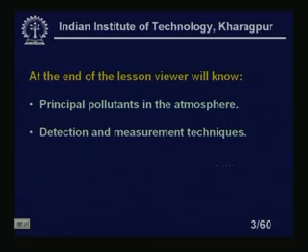Please note that in most cases, the detection techniques are based on the optical system. There is some filter, so we will take out the output and measure it. So basically it's an optical method of measurement in all cases of gas detection.

Then we have gas detection based on optical filter, as I told you earlier. Then we have the color code of air quality index. We have a color code, so that by looking at the color, I can say what is the quality index of the air or environment. So all these things we will study in this particular lesson.

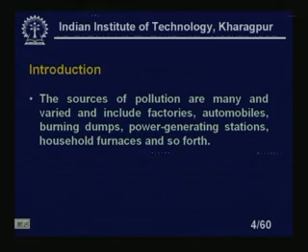The sources of pollution are many and varied, including factories, automobiles, burning dumps, power generating stations, household furnaces, and so on. These are the different types of pollution you will get, along with other basic municipal pollutions.

Factories and automobiles are the main source of pollution in any big city or metropolis. Power generating stations, even when remote from the main cities, will pollute neighboring areas and villages, destroying nearby paddy fields. Household furnaces are not very common in our country, but in many places people still use coal-based or kerosene stoves, which also pollute the environment.

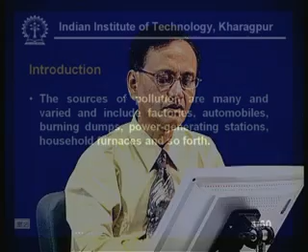So we will study all these things. Common harmful chemicals emitted into the atmosphere include hydrocarbons, oxides of nitrogen called NOx, nitrogen dioxide, nitrogen monoxide, carbon monoxide, and sulphur dioxide. These are the main basic pollutants which are harmful.

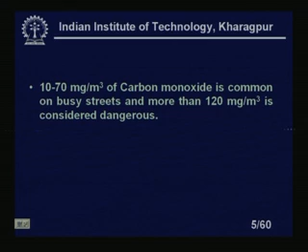10 to 70 milligrams per meter cube of carbon monoxide is common on busy streets, and more than 120 milligrams per meter cube is considered dangerous. We cannot say any environment will be totally pollution free. When you live in a city, where a large number of people live, there will be some pollution, but if it is within the safe limit, that is fine. If it crosses that particular limit, it becomes hazardous.

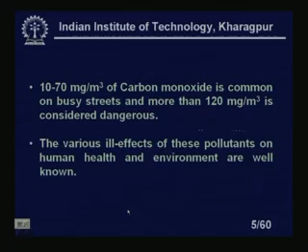The various ill effects of these pollutants on human health and the environment are well known. There are various causes of bronchitis, asthma—all this pollution makes people sick. So this content should be less and less.

It is now recognized that many chemicals undergo photochemical decomposition and reactions in the atmosphere, forming different pollutants which may be even more toxic than their precursors. This is another problem because it will react—a photochemical decomposition—making some other pollutants which are more dangerous.

The nitrogen oxides and hydrocarbons are the most important source of secondary pollutants, called smog and fog. In many cities you will find the morning full of smog, meaning visibility is extremely poor. It becomes very difficult for persons to drive on the streets, very difficult for aircraft to land, very difficult for trains to move, due to this smog. So this is also a very important sort of pollution.

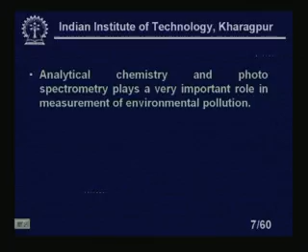Analytical chemistry and photospectrometry play a very important role in measurements of environmental pollution. These are the most important things we usually measure, to quantify the pollution rather than just discussing it qualitatively. Otherwise, how will I know whether it is 10 to 70 milligrams per meter cube, or whether it crosses the 120 milligram per meter cube limit?

The complete process can be broadly split into two steps: sample collection and sample analysis. We will first collect the sample of air that I want to analyze, to know how much pollution is there, then perform the sample analysis. One of the most important steps in air analysis is the collection of the sample. Once the sample has been collected, standard measurement techniques may be employed.

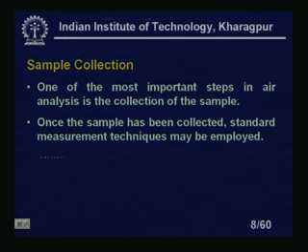The topic of sample collection can be broken down into two broad categories: general considerations and sampling train. So, what are the different precautions we will take for sample collection? What is the velocity of making the suction from the environment, and all these things.

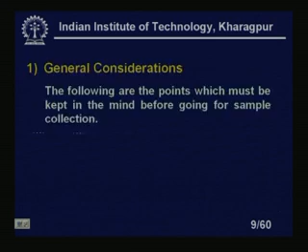General considerations: the following are the points which must be kept in mind before going for sample collection. Size of the sample - the volume of air sample, not the size of dust particles, but how much air you will collect from the environment to analyze it. The volume of air sample is governed by the minimum pollutant concentration that must be measured, the sensitivity of the measurements, and the information desired.

The sample size is generally chosen by trial and error method, and trial samples of more than 10 meter cube may be required to determine ambient concentration. Sometimes we need a large volume to know the ambient concentration or an average concentration, instead of taking very small samples. If we take a large sample, the results will be averaged over a particular area.

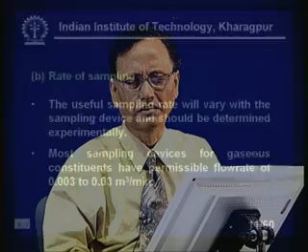Rate of sampling: the useful sampling rate will vary with the sampling devices and should be determined experimentally. Most sampling devices for gaseous constituents have a permissible flow rate. As I told you, we have to collect it with some suction pump. So, the velocity will be 0.003 to 0.03 meter cube per minute.

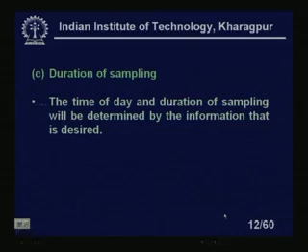Now, duration of sampling is also important. Time of the day and the duration of sampling will be determined by the information that is desired. Because if you take a sample on a busy street at 5 o'clock in the morning, there is hardly any pollution at that time, but at 10 o'clock in the morning, you will get an exact estimate of how much pollution is there, or what is the worst case pollution in the streets in the evening or morning.

Sampling period will give an indication of only the average concentration during that period. So, suppose I am taking a sample for 1 hour - that means I am averaging over that 1 hour. That is a good measurement.

Then, storage time of the sample - this is so important. Storage time of the air sample should be kept to a minimum, because in some cases it can decompose, so after making the collection we should do a quick analysis.

They should be protected from heat and light - this is another important thing. Care should be taken that the desired test component does not react with the other constituents or with the container. So, the container should be inert, probably made of glass or stainless steel, so that the pollutants or gases do not react with the container.

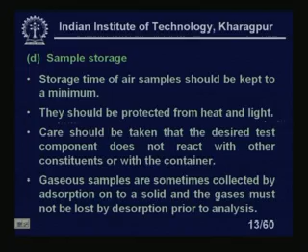Gaseous samples are sometimes collected by adsorption onto a solid, and the gases must not be lost by desorption prior to analysis. Many samples collected by adsorption remain on the solid material and should not be released or desorbed before analysis. Because if that gas desorbs before analysis, that particular gas will be lost - we cannot analyze it, and it will show as if there was no such gas, even though it was there and by that time it is lost.

Sampling train: the requirements for intermittent air sampling are a vacuum source, a means of measuring the amount of air sampled, and a collector. So we have a vacuum source, a means of measuring the amount of air sampled, and a collector, because without a vacuum source we cannot collect the sample.

Vacuum source: motor or hand driven vacuum pumps, aspirators, and automobile vacuums are generally used to draw the sample through a collection device. This is basically a pump by which you collect the sample from the environment and store it in a collector.

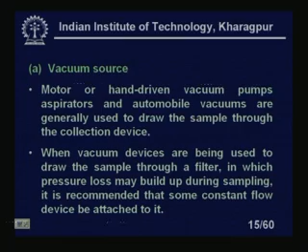When vacuum devices are used to draw the sample through a filter, pressure loss may build up during sampling, so it is recommended that some constant flow device be attached to it, because using a filter will cause some pressure loss across that filter.

Now, metering devices - flow measurement devices are of two general types. We have already studied these flow measurement devices in this particular course on industrial instrumentation.

Some will make the rate measurements, some will make the volumetric flow measurements, some will make the mass flow measurements. We are more interested here, instead of the rate measurements, on the volumetric measurements. Flow measurement devices are of two general types: those that measure the rate and those that measure the volume, or you can make the total volume also.

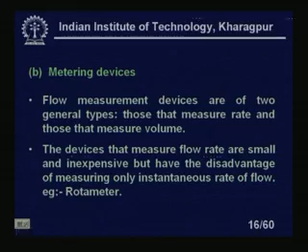The devices that measure the flow rates are small and inexpensive, but have the disadvantage of measuring only instantaneous rate of flow. One is the rotameter. It will just give the instantaneous rate of flow; it will not give the total volumetric flow of a device over a certain amount of time.

Devices that measure the volume record the flow passing through them and are therefore more useful. They are, however, bulkier and more expensive. The rotameter is a very simple indicating instrument, which we have studied in detail in flow meters. Other devices include turbine flow meters and other gas flow meters, or the orifice meter, which is obviously bulkier.

All gas measuring devices should be calibrated before use, because you are measuring the volume, so however much collection you are taking, it should be calibrated beforehand.

A direct calibration with the actual gas can be carried out by means of a gasometer system. Here the gas flowing to the flow meter during a timed interval is trapped in the gasometer bell, and its volume is measured.

The last component of the sampling train is a collector, which may be of a variety of types depending on the particular application. These are very important things to consider.

If you look at the gasometer, its basic principle is that it has a known volume device. Direct calibration with the actual gas is carried out using the gasometer system, where the gas flowing to the flow meter is trapped in the gasometer bell and its volume is measured.

The last component of the sampling train is the collector, which may be of a variety of types depending on the particular application.

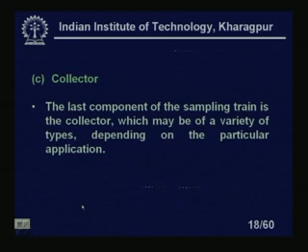For aerosol contaminants, one of the most commonly used means of collection is filtration. Fiber filters include wood fiber, paper, glass fiber, asbestos; granular filters include glass, metal, or porous ceramic sand; and membrane filters such as cellulose ester are also used. These are the different types of filters commonly used for aerosol contaminants in filtration.

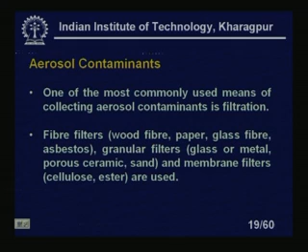A second type of collection device for both solid and liquid aerosol contaminants is the impinger. The aerosol impinges on a surface exposed to the air stream, and these include both dry and wet impingers.

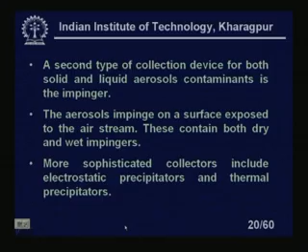More sophisticated collectors include electrostatic precipitators. These are collection devices that, in a sense, reduce environmental pollution, and are commonly used in power plants because of ash pollution. Using electrostatic precipitators collects the ash so it does not go into the environment; that type of principle is used here.

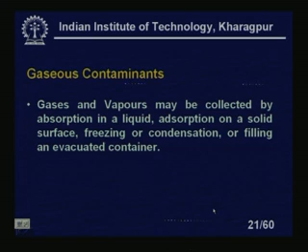For gaseous contaminants, gases and vapors may be collected by absorption in a liquid, adsorption on a solid surface, freezing or condensation, or filling evacuated containers. Evacuated containers can also be used, as told earlier, or it can be done by freezing, condensation, or absorption in a liquid, or adsorption on a solid. These are the different methods by which gaseous contaminants can be collected.

Absorption is one of the most widely used techniques for gas collection. The gas components of interest are dissolved in a suitable liquid or solution, or on the surface of a hygroscopic solid. The most efficient absorption device is the fritted glass scrubber, where it can be collected.

Carbon monoxide detections.

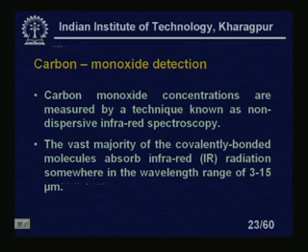Carbon monoxide concentrations are measured by a technique known as non-dispersive infrared spectroscopy. The vast majority of covalently bonded molecules absorb infrared radiation somewhere in the wavelength range of 3 to 15 micron. This is the entire range of absorption spectra for various gases in the infrared region.

This represents the amount of energy required to start atoms vibrating with respect to each other. Carbon monoxide is a very simple molecule that has only one mode of vibration, analogous to a coil spring - a wound coil spring will vibrate like this. It goes to displaced positions and comes back to the same bond again, releasing light energy.

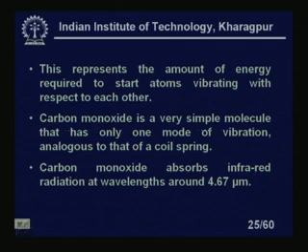The carbon monoxide absorbs infrared radiation at wavelengths of around 4.67 micron. The atoms take up the light energy to move slightly further apart than normal - the two atoms go further away. Then it collapses, releasing the light and returning to the same state again. So the atoms take up the light energy to move slightly apart, then liberate that energy in the form of heat when they decompress.

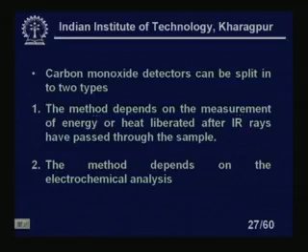Carbon monoxide detectors can be split into two types. The first method depends on the measurement of energy or heat liberated after IR rays have passed through the sample - that is the optical method. The next method depends on electrochemical analysis. So these are the two methods: the optical method and the electrochemical method.

Carbon monoxide analyzers pass an infrared light beam alternately through a reference cell containing a non-absorbing gas like nitrogen, and a sample cell containing air with carbon monoxide to be measured. The infrared light of 4.67 micron wavelength is absorbed from the sample to the extent that corresponds to the carbon monoxide concentration.

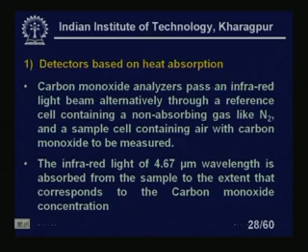The next step is to receive the infrared beam through a nitrogen-filled reference cell and a sample cell, which now have different intensities due to light absorption by carbon monoxide in the sample cell versus the nitrogen-filled reference cell. The difference in measured intensity is converted to a carbon monoxide concentration - one reading without carbon monoxide and one with carbon monoxide gives us the difference.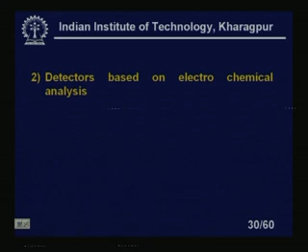Now, detectors based on electrochemical analysis work like this: when the gas is electrolyzed while maintaining the potential between the electrodes immersed in electrolyte, the current assumes a value proportional to the gas concentration. This is because the electric potential at which electrolysis takes place depends only on the carbon monoxide concentration, which is then measured.

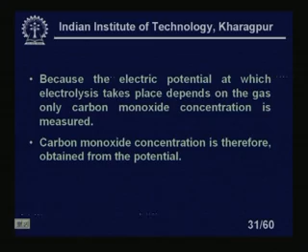Carbon monoxide concentration is therefore obtained from the potential. If I measure the potential, it can be calibrated in terms of the carbon monoxide concentration in the gas, because the electric potential at which electrolysis takes place depends only on the concentration of carbon monoxide. So that voltage can be directly calibrated in terms of carbon monoxide concentration.

Now, NOx measurements are very common, not only in our environment but also in industry. NOx means nitrogen oxide and nitrogen dioxide - these two types of gases we are calling NOx. NOx Analyzer, NOx Measurement, NOx gas.

So whenever we talk about NOx, it means NO subscript X - nitrogen oxide and nitrogen dioxide. NO is nitrogen monoxide, and nitrogen dioxide is NO2.

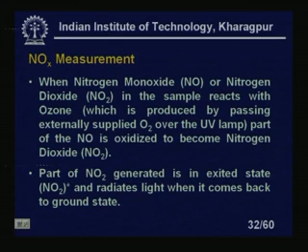When nitrogen monoxide or nitrogen dioxide in the sample reacts with ozone, which is produced by passing externally supplied O2 over a UV lamp, part of the NO is oxidized to become nitrogen dioxide. Part of the NO2 generated in this process is in the excited state - we define it by this notation.

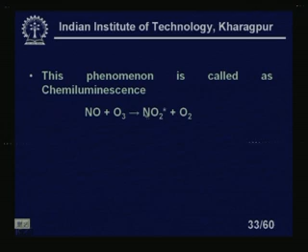This phenomenon is called chemiluminescence. We define this NO2 with an asterisk to mean it is in the excited state. NO2 asterisk, the excited state, goes to NO2 plus H nu - releasing energy. So the light will be emitted.

This reaction is very fast and only NO is involved, without almost any effect from other coexistent gases. This is important to remember, because it should not react with other gases, so the concentration of other gases cannot be detected by this method.

So this phenomenon is called chemiluminescence. Nitrogen oxides react with ozone, making nitrogen dioxide which is in the excited state. It will go back to the normal nitrogen dioxide state, liberating light.

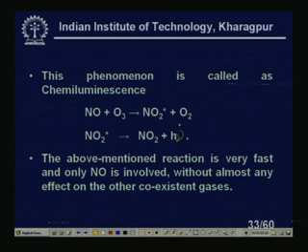This method is very fast, and only NO is involved without almost any effect from other coexisting gases. If the NO is at a low concentration, the quantity of luminescence is proportional to that concentration.

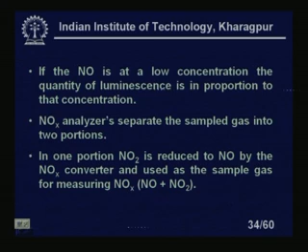Now, NOx analyzers separate the sample gas into two portions. In one portion, nitrogen dioxide is reduced to NO by the NOx converter and used as a sample gas for the measurement of NOx, which is NO plus NO2. In the other, the NO sample gas is used as it is.

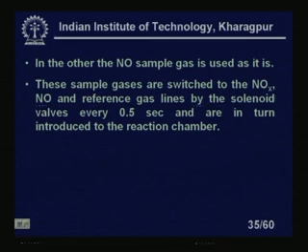These sample gases are switched to the NOx, NO and reference gas lines by solenoid valves every 0.5 seconds, and are in turn introduced into the reaction chamber.

On the other hand, the open air that was separately sucked through the air filter is dried by the self-reproducing type silica gel dryer, then introduced as ozone gas into the reaction chamber by the ozonizer.

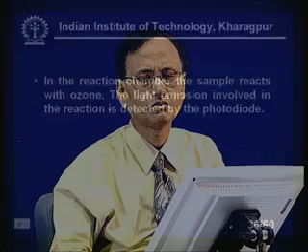In the reaction chamber, the sample reacts with ozone. The light emission involved in the reaction is detected by the photodiode, which in turn gives a current that is calibrated as a concentration.

So photodiode output will be current - photodiodes can always be used for detection of light, and that output can be calibrated in terms of concentration.

Now, what are the precursors and pre-processing we must note? One of the problems with NOx measurement is its affinity to water. Any water present will immediately be absorbed, and you cannot find the NOx. So the container should be totally air or water free - that is the most important thing.

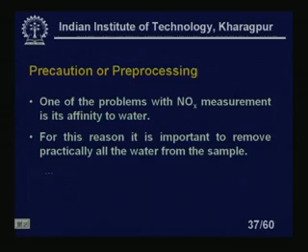For this reason, it is important to remove practically all the water from the sample, because when water is in the sample it may cause other issues. So before analyzing the sample, all the water should be removed.

Dryer is used for this purpose because silica gel dryers and all these dryers will obviously remove the moisture content in the NOx, keeping the NOx as it is for analysis purposes, because ultimately we have to make the analysis of this NOx.

Now, sulphur dioxide is another form of pollution in the environment, so we must look at what type of pollution this is. It is very hazardous, so we must know the contents of sulphur dioxide in the air. Analysis of sulphur dioxide is based on the principles of fluorescence spectroscopy, as I told you, this mostly depends on spectroscopy.

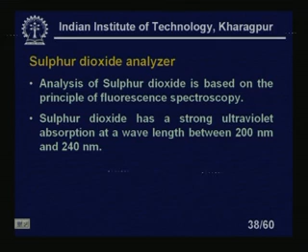Sulphur dioxide has strong ultraviolet absorption at a wavelength between 200 and 240 nanometers. The absorption of photons at this wavelength results in the emission of fluorescence, because this energy cannot just get lost - it is consumed by the sulphur dioxide atom and released as fluorescence.

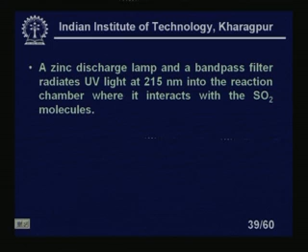We measure the fluorescence and calibrate it by spectroscopy in terms of the sulphur dioxide concentration. A zinc discharge lamp and an optical bandpass filter radiate ultraviolet light at 215 nanometers into the reaction chamber, where it interacts with the sulphur dioxide molecules.

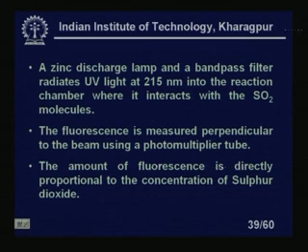The fluorescence is measured perpendicularly to the beam using a photomultiplier tube. A photomultiplier tube is, instead of nowadays you can use photodiodes also or phototransistors - it just multiplies and increases the output current, as simple as that, nothing more. The amount of fluorescence is directly proportional to the concentration of sulphur dioxide, which we are measuring with the photomultiplier tube.

One of the major problems with sulphur dioxide is its extremely corrosive nature and affinity to water. Unlike NOx, which is not that corrosive, sulphur dioxide is corrosive in nature as well as having affinity to water. So we should take higher precautions for analyzing sulphur dioxide than nitrogen dioxide - if I remove all the water from NOx using a dryer, that is fine, no problem. But here we have to think that whatever containers we use should not react with the sulphur dioxide.

The presence of any condensate will quickly remove all traces of sulphur dioxide from the measuring system. So if there is even a little presence of water, it will remove all the traces. Ultimately while analyzing, you won't get any SO2 reading, giving you wrong measurements or wrong indication, which is undesirable.

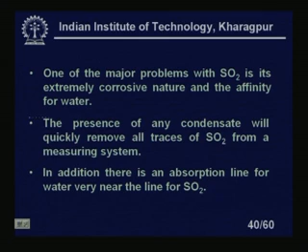In addition, there is an absorption line for water very near the line for SO2. This means the presence of any water vapor will affect the readings, causing lower than expected sulphur dioxide readings. So not only does the reaction occur, but this line also lies very close, resulting in low readings of sulphur dioxide in the presence of water vapor or steam.

Infrared sensors for sulphur dioxide have the advantage of lower cost, but at the expense of greater size. Nevertheless, infrared sensors are one of the most preferred methods of measuring SO2 concentrations in the field nowadays, because of these advantages.

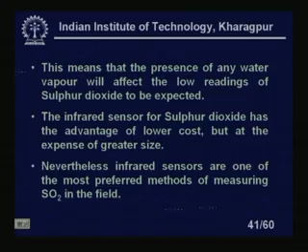That line corresponds very closely to the line of water vapor. Now let's look at ozone detection. The ozone detector works on the principle of absorption spectroscopy or spectrometry or photometry. The wavelength range for ozone is 220 to 330 nanometers, and the absorption spectrum extends to 253.7 nanometers, which corresponds to the main emission line of mercury. So the ozone absorption coefficient was experimentally defined at this wavelength.

253.7 nanometers. To determine ozone concentrations, a sample of ambient air is drawn through a flow cell, which is irradiated with ultraviolet light of wavelength 253.7 nanometers from a mercury vapor lamp.

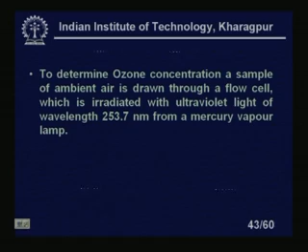Mercury vapour lamp will make a particular wavelength, 253.7, as its line is same as the mercury, so it will produce that stable wavelength. The intensity of ultraviolet light detected by the instrument is reduced depending on how much ozone is in the sample to absorb it. If there is more ozone, it will absorb more, so the intensity will be reduced. If there is less ozone, I will get higher output; if more ozone, less output. So that is an indication of the concentration.

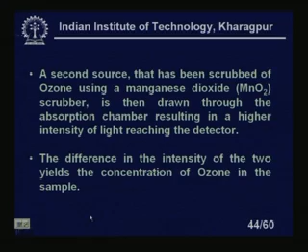A second source that has been scrubbed off ozone using a manganese dioxide scrubber is then drawn through the absorption chamber, resulting in a higher intensity of light reaching the detector. The difference in the intensity of the two yields the concentration of the ozone in the sample.

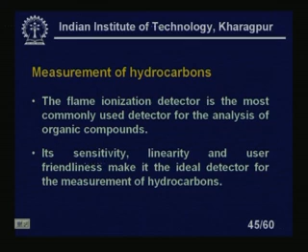Now, measurements of hydrocarbons - hydrocarbons means combinations of methane, ethane, all these things we are calling hydrocarbons. In petrochemical industry, sometimes we call it hydrocarbon-intensive industry also. The flame ionization detector is the most commonly used detector for the analysis of organic compounds or hydrocarbons, both in the environment and in the factory. Its sensitivity, linearity and user friendliness make it the ideal detector for measurement of hydrocarbons.

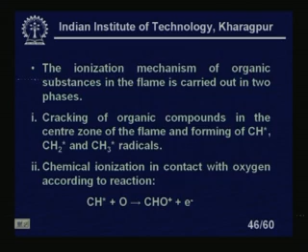The ionization mechanism of organic substances in the flame is carried out in two phases. What are the two phases? First, the cracking of organic compounds in the center zone of the flame, forming CH, CH2, and CH3 radicals. Second, chemical ionization in contact with oxygen according to the reaction: CH radical plus O gives CHO plus one electron. The molar response is defined as being proportional to the number of carbon atoms of the molecule.

The electrons are extracted from the flame using a voltage polarization applied between the nozzle and the collecting electrode.

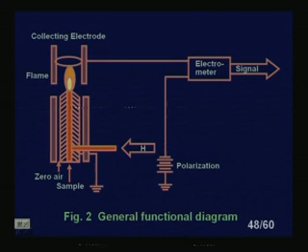Current obtained from the collecting electrode is converted to a voltage and subsequently digitized by the ADC for further processing, because if it is analog signal, I have to convert it to the digital domain by ADC. Figure 2 shows the detailed mechanism of this type of detector. The flame ionization detector sends a signal proportional to the number of atoms composing the hydrocarbon molecules present in the sample, or total hydrocarbons.

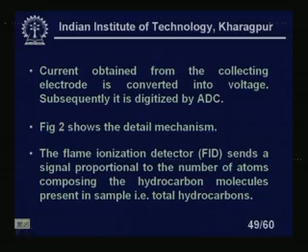Now, another important thing is the air quality index. What is the quality? How do you index it? How do you make the air safe and all this? You must have some index, because if you look at the general public, they will not understand what is this concentration or what is a safe level. So instead of expressing the concentration of carbon monoxide or sulphur dioxide separately, we make the air quality index, which includes the visibility and the quality of the air.

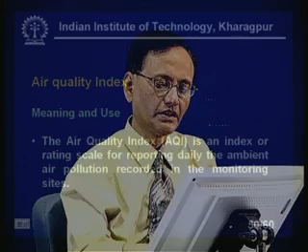Now, let us look at the meaning and use. The air quality index is an index or rating scale for reporting daily the ambient air pollution recorded at the monitoring sites. It usually gives some index of how the air quality in a particular site is, good or bad. The two objectives of AQI are to inform and warn the public about the risk of exposure to daily pollution levels, as I told you earlier.

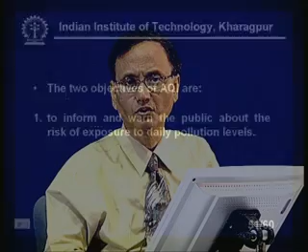So usually we will define this thing. Obviously, we must have a goal that we have to reduce this to some level. People also will know, so there should be some protective measure to bring it down to a particular level.

To enforce regulatory measures for improving AQI, what precautions should we take. Recently air quality has been extremely poor in India, in a metropolis like Delhi, because of a lot of automobile pollution there. So they converted everything to CNG, which gives less pollution. Every time they measure the air quality people are inhaling, what is the dangerous level, and once they switched to CNG for all cars and buses, people found the air quality index improved a lot. This gives a single index so people will know how good the air they are breathing is.

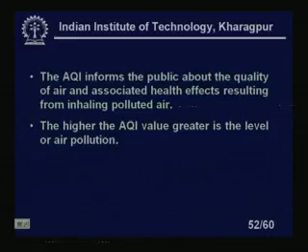The AQI or air quality index informs the public about the quality of air and associated health effects resulting from inhaling polluted air, what are the ill effects and how can you reduce them. The higher the AQI value, greater is the level of air pollution. So obviously the desired value should always be lower and lower. That is the most important thing for air pollution.

Four major pollutants including the suspended particulate matter PM10 are considered for reporting AQI. PM10 is particulate matter of size 10 micron or less. There are PM2.5 also, but we are considering PM10, meaning not more than that, particulate matter of size 10 micron.

Measurements and calculations: the concentration of the pollutant is measured by air quality monitoring equipment at a monitoring station. This pollutant concentration is converted to an index value using the following equation: Index value equals pollutant concentration divided by pollutant goal concentration, multiplied by 100. What is our goal, what is the actual desired value of concentration, and what is the actual concentration now - that gives the index value multiplied by 100, a quantitative measure for the quality of air people are breathing.

The pollutant goal concentration used to calculate the index value is either the NEPM standard for that particular pollutant, or the EPP goal in the case of visibility. Let us look at what is NEPM and EPP.

NEPM is the National Environment Protection Measures. Every country has this. This is basically a broad framework setting statutory instrument defined in the National Environment Protection Council, and they outline and agree on national objectives for protecting or managing particular aspects of the environment.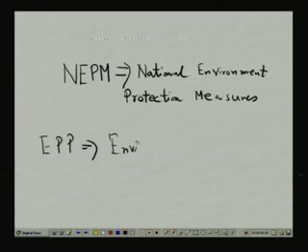And also we have EPP. EPP is basically Environmental Protection Policy. This also looks at all these things.

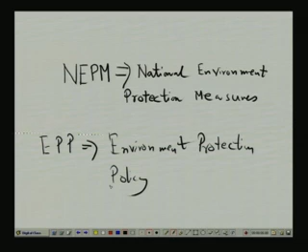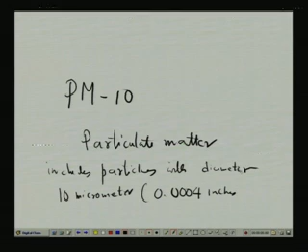Now let us take a new page. PM10 is the particulate matter that includes particles with a diameter of 10 micrometers, which is 0.0004 inches, or about 1/7 the width of a human hair.

We also have PM2.5, but we are not discussing that. Previously there were TSP monitors, which we are also not discussing here.

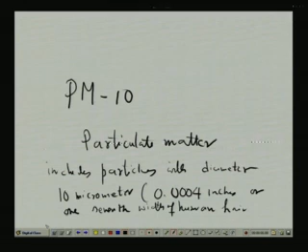The pollutant goal concentration used to calculate the index value is either the Air NEPM standard for that particular pollutant, or the EPP (Air) goal in the case of visibility. Visibility is most important because if there are suspended particles, or PM10 present, it will reduce the visibility of a person. So what should the visibility goal be - 10 kilometers or 20 kilometers - that we must know. This gives some standard for a particular country. The Air NEPM standards and EPP (Air) goals used in calculating the index values are presented in Table 1.

You see here, that's Air NEPM standards. Ozone is 0.10 parts per million, averaged over 1 hour. Nitrogen dioxide is 0.12 parts per million for 1 hour. Sulphur dioxide is 0.20 parts per million for 1 hour. Carbon monoxide is measured over 8 hours, and PM10 is 50 microgram per meter cube for 24 hours. These are the NEPM standards.

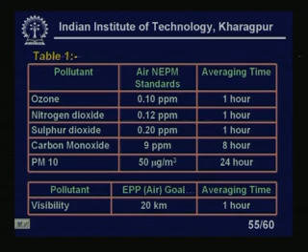And for pollutant visibility, it is 20 kilometers. The EPP goal is 20 kilometers for 1 hour averaging time. The EPP goal for visibility reduction particles is 20 kilometer visibility, which means you would be able to see clearly for at least 20 kilometers.

Obviously this is a sort of pollution consideration. Why have we taken PM10? These two should be different, because some gases like carbon monoxide and ozone are not visible, but they still pollute the air. We consider two types: visibility consideration and health hazard. Visibility is not hazardous to people directly, but it makes other things difficult - the landing or taking off of aircraft, or the movement of trains or cars becomes difficult. That's also a measurement of pollution. That is the reason we have introduced PM10.

This goal is related to the light scattering coefficient value measured using a nephelometer. A scattering of 235 or less, where mm minus 1 is per million meters, is equivalent to visibility of more than 20 kilometers. So this will also give you the visibility value. Usually in many countries nowadays they will straight away give you the visibility from these measurements.

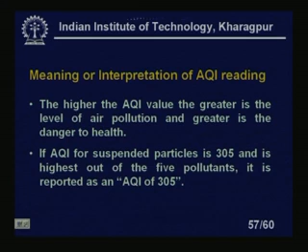Meaning or interpretation of AQI reading: the higher the AQI value, the greater is the level of air pollution and greater is the danger to health. PM10 is also considered along with visibility. AQI for suspended particles is 305, the highest out of the 5 pollutants, and it is reported as an air quality index of 305.

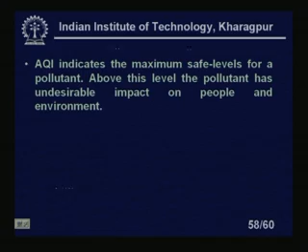AQI indicates the maximum safe levels for pollutants, and above this level the pollutant has an undesirable impact on people and the environment. This indicates the maximum safe levels for pollutants and how much pollution it can cause. If it goes above that level, it is not good for the health of persons or any living being.

If AQI falls below 50, the air quality is considered extremely good. As I told you, if the AQI is higher, pollution is more. An AQI reading between 51 to 100 indicates moderate air quality. An AQI reading from 101 to 200 indicates poor air quality, and a reading over 201 indicates very poor air quality, and an AQI above 301 is regarded as critical to human health.

This is some category, it varies from country to country, but it is always desirable that the AQI should be below 50.

Now we have a color code representation of AQI, so that anybody can understand it. Green always means friendly, environment-friendly, a good environment, so we have given it the color green. So 0 to 50 AQI value is green color, meaning good. 51 to 100 is marginal moderate, we have yellow - I cannot justify why it is yellow, it is just a standard to be followed. Obviously green means our environment is green, always better for us.

Then we have 101 to 200, unhealthy, poor, which is orange. Then 201 to 300 AQI value is very unhealthy, very poor, which is considered red, an alert - red always means alert. And 301 plus is critical.

There is no more for consumption, I mean for that, air's consumption for the human being or any living animals. So these are the things which we have considered in this. What we mean by AQI.

Because it is very difficult to remember all these numbers, instead of giving the numbers, we will measure this, but once we define it to the public, we will give it with some color, so that green is better, yellow is okay fine, orange is not that good, red is quite bad, and if purple, it is extremely bad. So with this AQI color coding we can explain to the general public what color they should expect in their particular area of residence or a particular area where they are working. So with this, I come to the end of lesson 37 of industrial instrumentation.

Welcome to lesson 38 of industrial instrumentation. In this lesson we will cover the control valve. In fact, this lesson 38 and 39, both will be dedicated to control valve 1 and control valve 2.

Control valve, as you know, is a final control element in a process, and it is the most important part of any industrial instrumentation. Now so far we have studied the many sensors which actually measure the process variable: flow, temperature, pressure, viscosity, pH, and so on and so forth. Now all this actual measurement is basically to control that particular process.

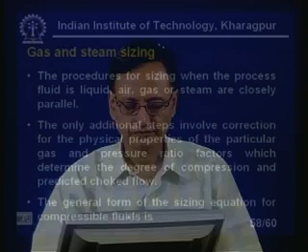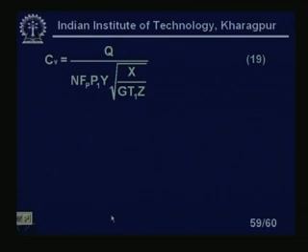The general form of the sizing equation for the compressible fluid is: CV equals Q upon N, F P, P1, Y root over X upon G T1 into Z, equation number 19, where the legends are: X is the ratio of the pressure drop to upstream absolute static pressure. That is the reason we are interested in P1.

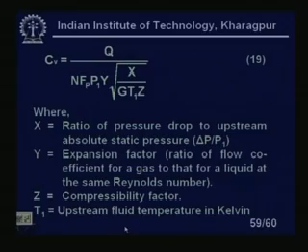The previous equation number 18 also, we have seen that P1 is important, not P2. Y is the expansion factor, ratio of the flow coefficient for a gas to that for a liquid at the same Reynolds number. Z is the compressibility factor, and T1 is the upstream fluid temperature in Kelvin. So all these legends are defined.

Now every time you see that CV is the most important thing in the valve parameters, there is no other, because if you define CV or find CV, all other parameters will be automatically fixed. There are some parameters like small d, capital D.

So first, while choosing the valve, I have to calculate the desired CV you want for a particular application. Once you find the CV, from the selected list of valves, you try to choose a CV which will match very closely. You may not get the exact match; if it is 70 to 90% of the value of the CV which you have seen, that will be the desired range of the control valve. So that particular control valve is to be chosen and installed in the process.

Now with this, we will cover this in industry, I mean this control valve, we will continue in lesson number 39 also. We will go into further details and solve some problems in lesson 39. So with this, I come to the end of lesson 38 of industrial instrumentation.